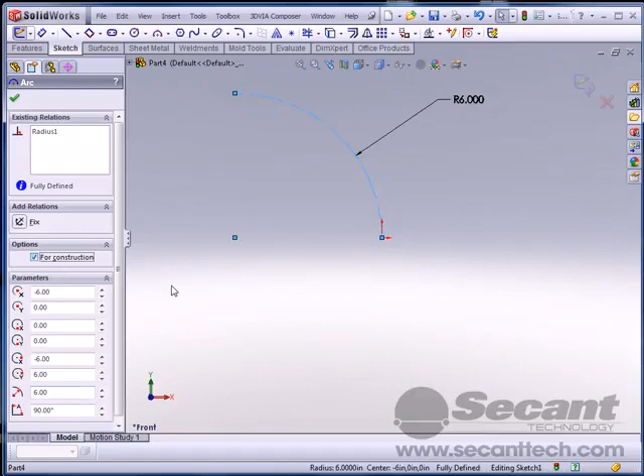We'll say that it's 6. Alright, I'm going to turn this into a construction line, and I'm going to throw some lines on here, and make all 3 of these equal.

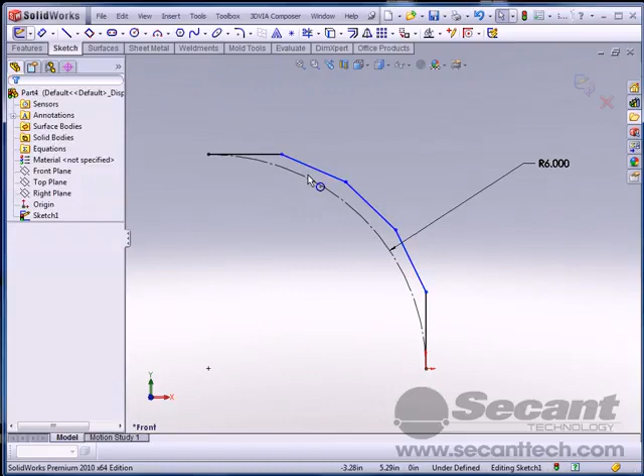I'll select the midpoint of that, and then this arc by holding my control key down, and do a coincident constraint. Same thing for this one, and the same thing for this one.

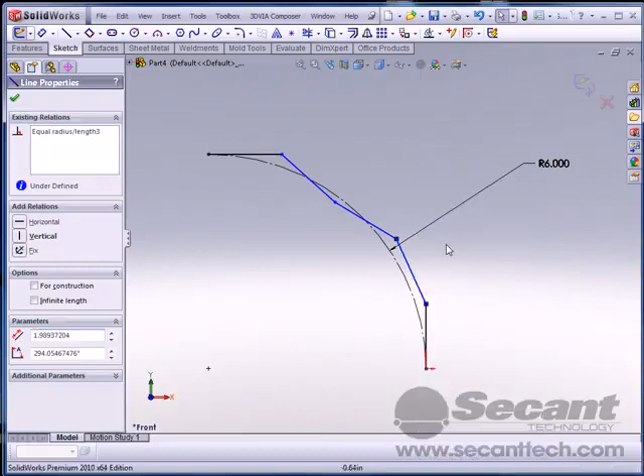You can kind of see we've ended up with something kind of neat there. I'm going to make these 2 pieces equal, and that tidies up the whole thing, because that's the only way all those parts can be put together. So if you needed more segments, you could obviously put more segments in there - it would just take a little bit more time.

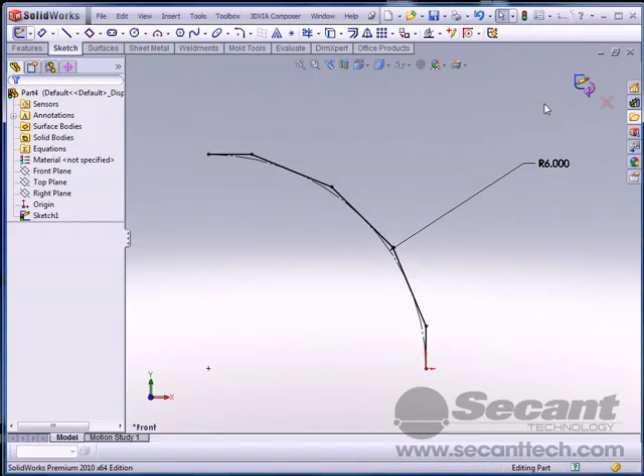Alright, now we need to create a profile of the actual pipe that we're going to sweep along. So let's create that - it's called a circle. Alright, let's put a radius on here, diameter rather, 6.

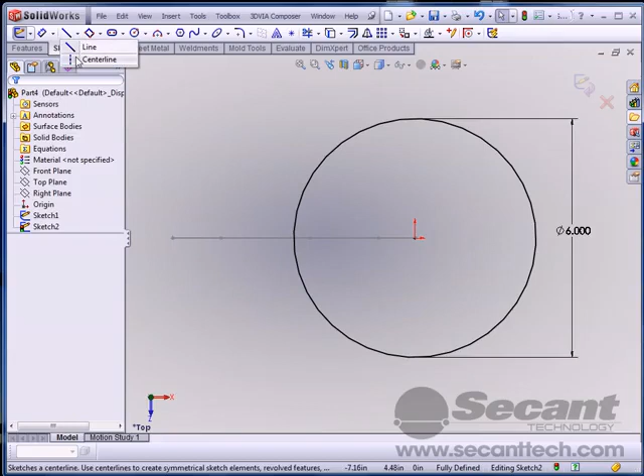And we need to break this thing up, so I'm going to set it normal to again. We're going to want our seam to be on the inside of our elbow, so let's go ahead and create a construction line in here. I'm going to run it out to the quadrant.

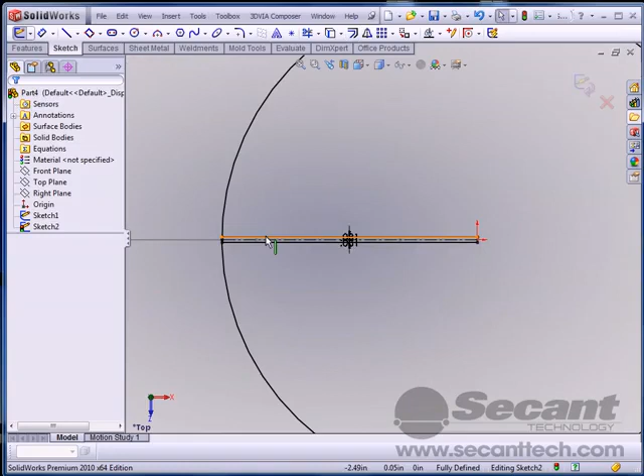And we'll do some offsets here, 65 divided by 2. I'm going to pick this, and all this is doing is giving us both sides of that. I'm going to turn both of those lines I just made into construction lines.

I'm just using that to trim this up. So if you need to tighten that up or make that gap bigger, you can do that by adjusting those 2 dimensions there.

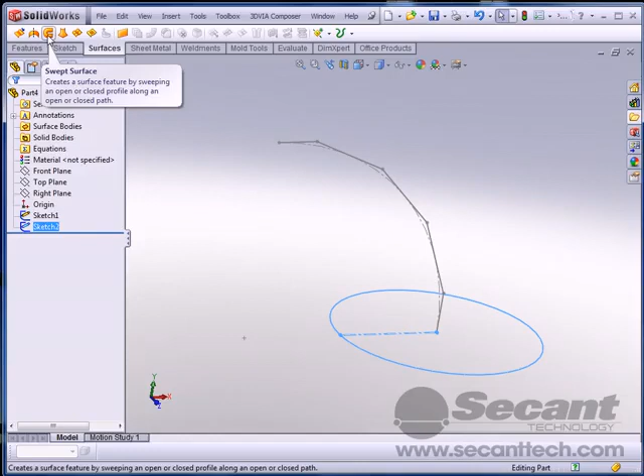Alright, now we're going to use the surface command and do a swept surface, picking that as my profile, and then picking this as my sweep.

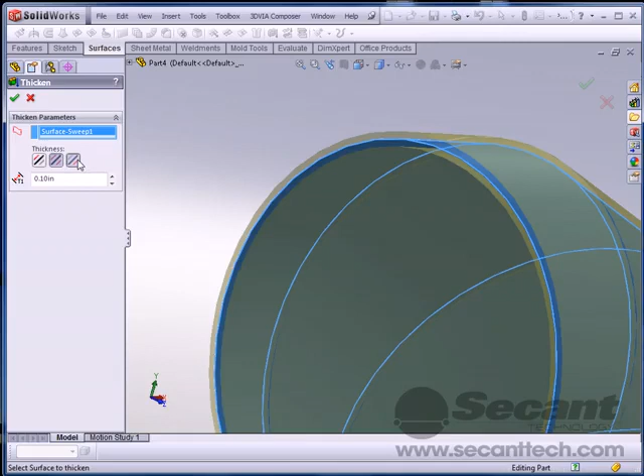And now we're going to give this thing a thickness. I'm just going to pick on that, and you can see we can go to the outside, we can do mid, or we can go to the inside. I'm going to assume that this pipe was 6-inch ID. And I don't know what thickness I just made it - I made it some sort of thickness, doesn't really matter.

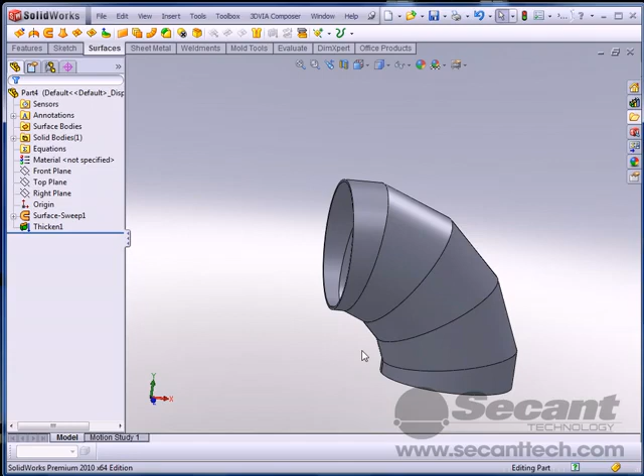Alright, so no, we cannot just flat pattern this out. We actually have to break this up into some other parts right now in this release. One of the things we have to do is break this thing up into 5 parts, and let me show you how we're going to do that.

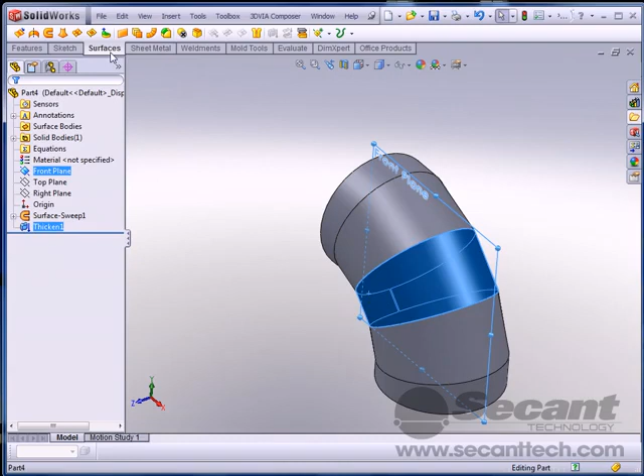We're going to do that by using the split face command, very similar to if you saw the video for the super hopper - we're going to use the same technique here. I'm just going to pick those 2 entities and make a new plane here.

One of the things I love about SolidWorks is the ability to create planes, especially tangent planes. When I used to work in Inventor, it would take forever to do some of that stuff - you had to make construction lines or a work plane to make another work plane. It was just really a pain.

Alright, so I'm just going to come in here and draw lines over the edges of these.

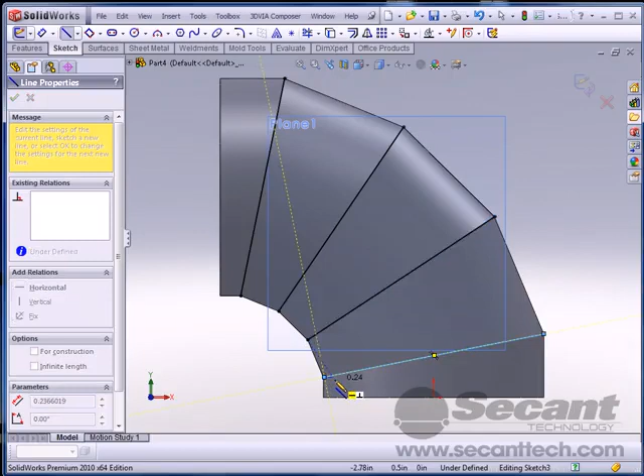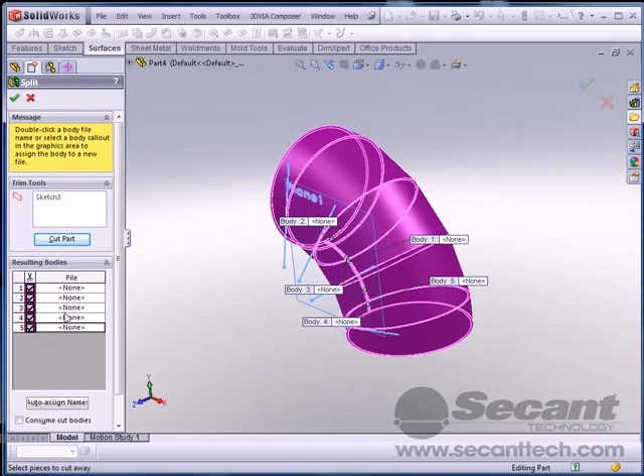I'm just going to do an insert, features, split, and tell it to cut the part. You can see we've actually got 1, 2, 3, 4, 5 different parts now. Or actually 5 different bodies. So here they all are.

Let's clean up our mess here so we don't see what we've got going on. Alright, so far we've only got, what, 1, 2, 3, 4, 5 features.

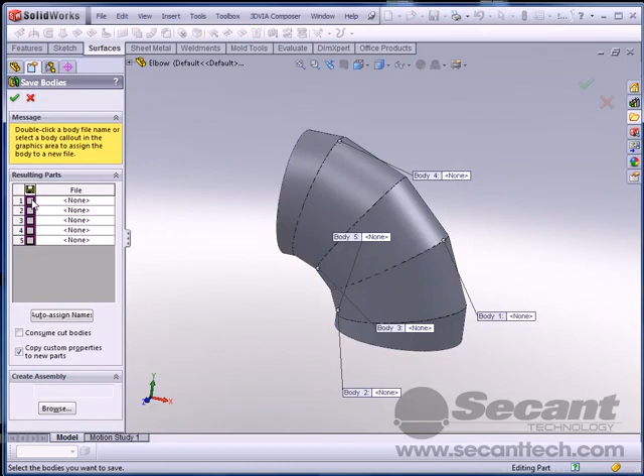Now we need to create separate parts and an assembly of this. Now let me go out here and do save bodies. And this first one, we're just going to call it...

Elbow mid 2. Not elbow, how about elbow? So save. And this one we'll call—we really don't have to save all of these, but I'm doing it so you can see the whole thing. Let's see, which one is that one? So we'll call it elbow mid 1. And this one we'll call it, for lack of any imagination, elbow mid 3. And we'll call this one elbow end 2. That's so clever. We'll call this elbow end 1.

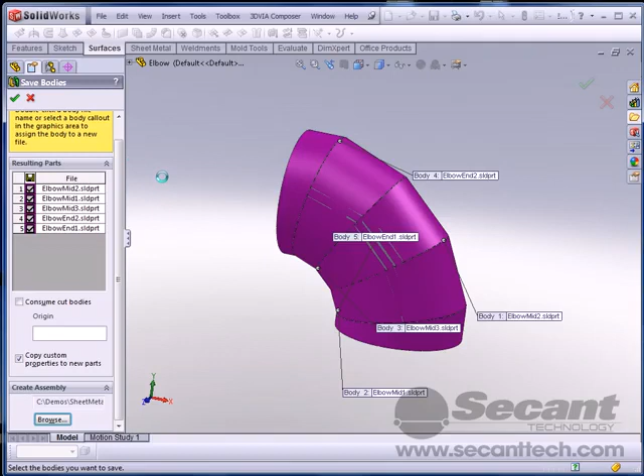Now the last thing we have to do is tell it that we want to create an assembly here. So I'm just going to tell it to browse, and we'll create an elbow assembly here. And we'll tell it to save. Now what this will do is it actually saves out each one of those bodies into separate files, and it will create an assembly file where all the parts are entered into the assembly.

Alright, so here's our main elbow piece here. And if I go to Window, I can go to Elbow Assembly, and we actually have a 5-part assembly in here. Let's see, alright, so let me pick elbow end 2. It's a little easier to see.

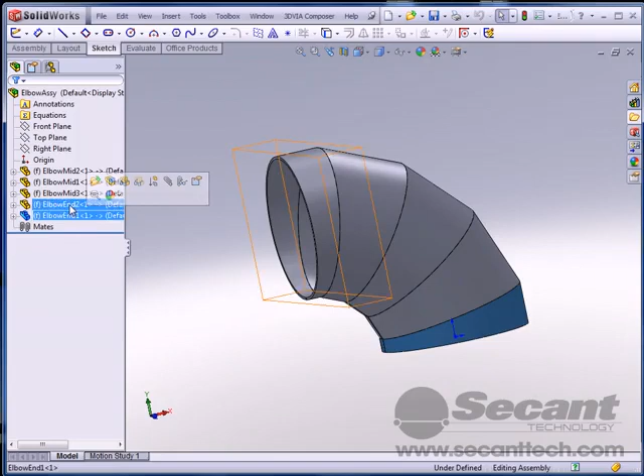All I'm going to do is edit this part, go to my sheet metal, insert my bends, pick this straight edge right here. I'm going to tell it OK. And say, well, what happened? Well, it made my flat pattern layout for that. Alright, so now we need a flat pattern layout for this.

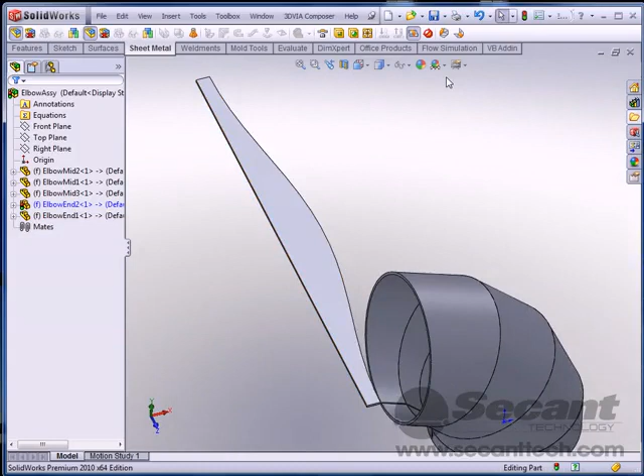All 3 of these pieces are really the same, and this piece is exactly the same as this piece, really. So I'm only going to do it for these 2. So let's do it for mid 3 here. I'm going to edit that part, and again, just in case you missed it a second ago, we're under sheet metal.

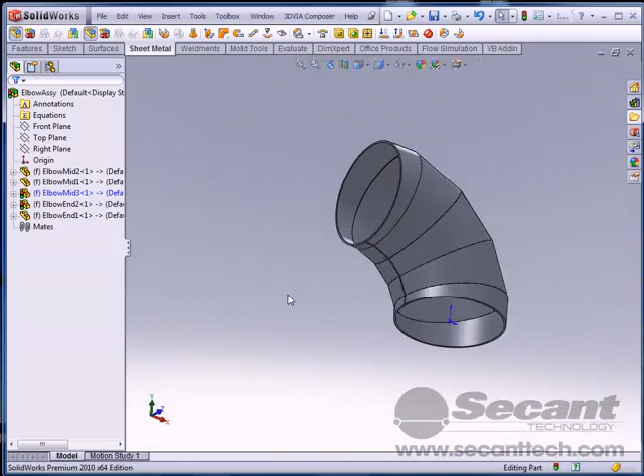I pick this button, pick the outside edge here, I say go, and you say what happened, just like you did before. And I do that, and I say, here's my flat pattern layout again. Now, for some of you that may seem like a whole lot of work. The cool thing is that now we've made all the elbows that you ever need to make—well, all the 5-section elbows, I should say.

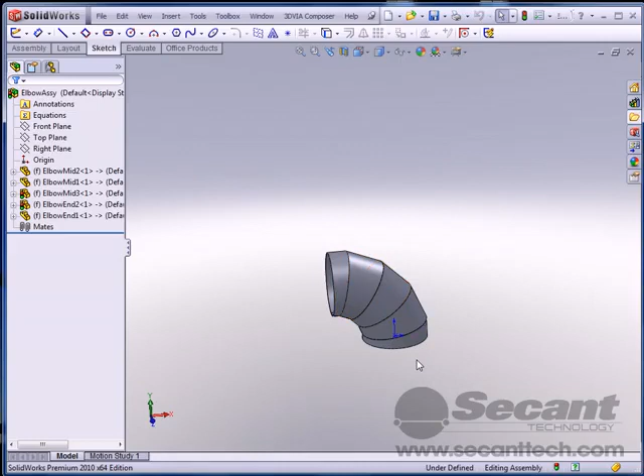So you say, oh, how is that possible, Steve? Well, here we go. I'm going to go back to my original sketch, and let's go to this, and let's make this like 12. Do an update. Wow, so now I've got—obviously on something like that you probably want to do more sections, but maybe not, I don't know. So that's cool.

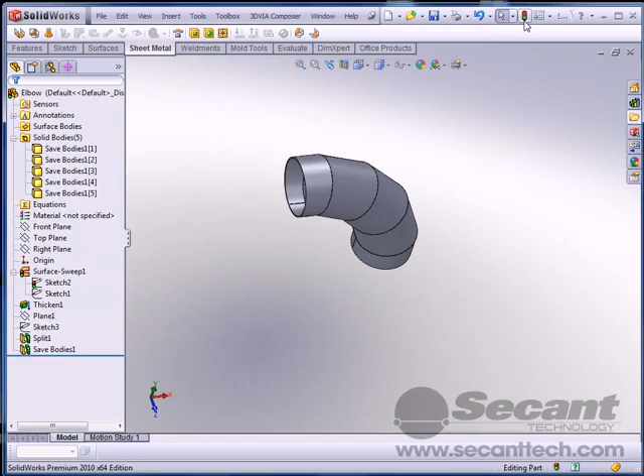Now I come back over here and I say, hey, you know what, this is really a 10-inch pipe. And of course we could change the thickness and all that stuff too. When we update, pow, we're done there.

We do a save. Go back to our window, elbow assembly. It says everything is updated, do you want to update? I say yes. We watch it grow, and then I go back to my end, and once I flatten that out, you can see it's a much longer piece than it was before.

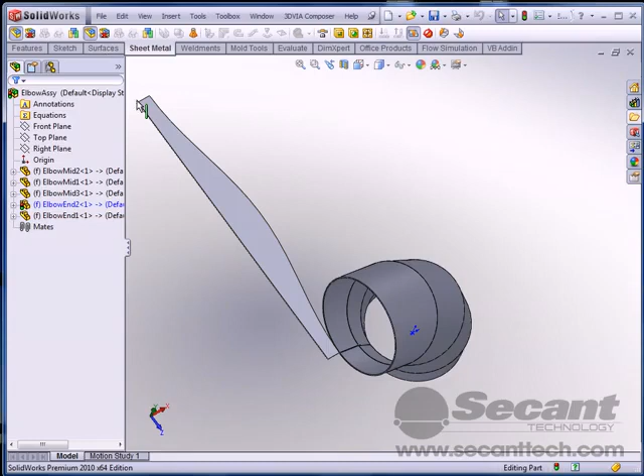And again, with the mid 3 component, it's the same thing. So there you go. Pretty much you could make configurations after this and have it all in the same set of files, or you could just do a pack and go. I hope this helps you out if you need to make an elbow transition pipe like this and get the flat pattern layout. Thanks a lot.